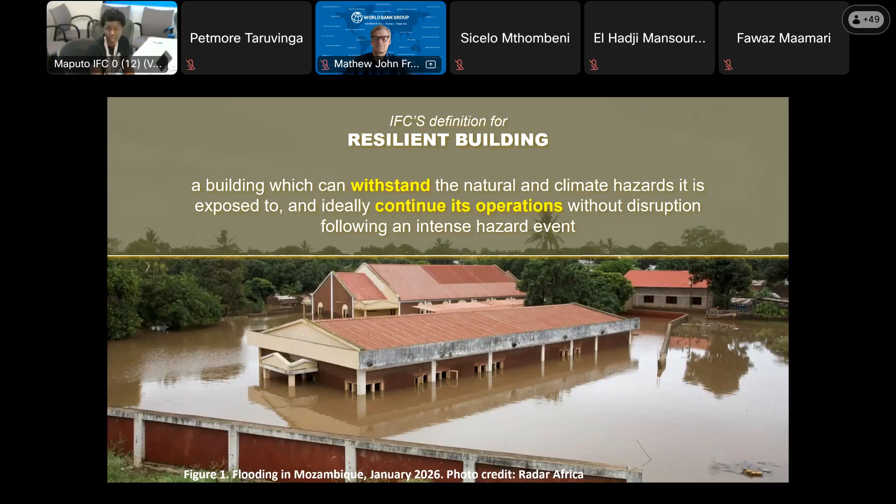So what makes a building resilient? First is the physical integrity. For a building to be considered resilient by the Building Resilience Index program, it must show that after a natural disaster, this building will be capable of maintaining at least 50% of its physical integrity. Hopefully the building will maintain more than that, but starting from 50%, it can already be considered resilient. But also, it is important for the building to continue its operations, so operational continuity is something that Building Resilience Index also adds on top of the physical integrity.

So the first step for a building to be considered resilient is to identify the site risks. By identifying the site risks, we can understand if we are choosing a location that is more prone to hazard risks. If we choose carefully, we can limit the amount of hazards that our building will be subject to. And then we can design the building to resist those hazards that cannot be eliminated, and construct based on this design that is already resilient.

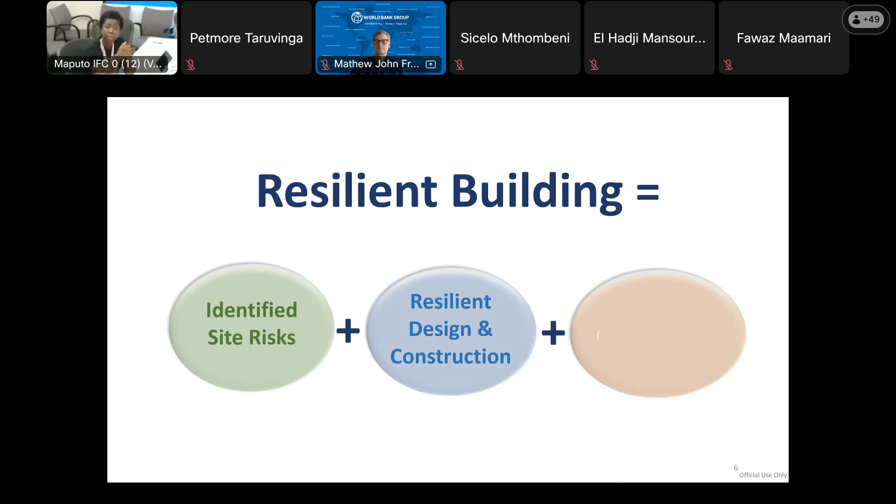By doing so, and including some maintenance actions, we can indeed have a resilient building. So diligent maintenance is also important, because without maintenance, even if we self-assess a building, after years this building can lose some of its integrity. So maintenance is also an important focus point for a resilient building.

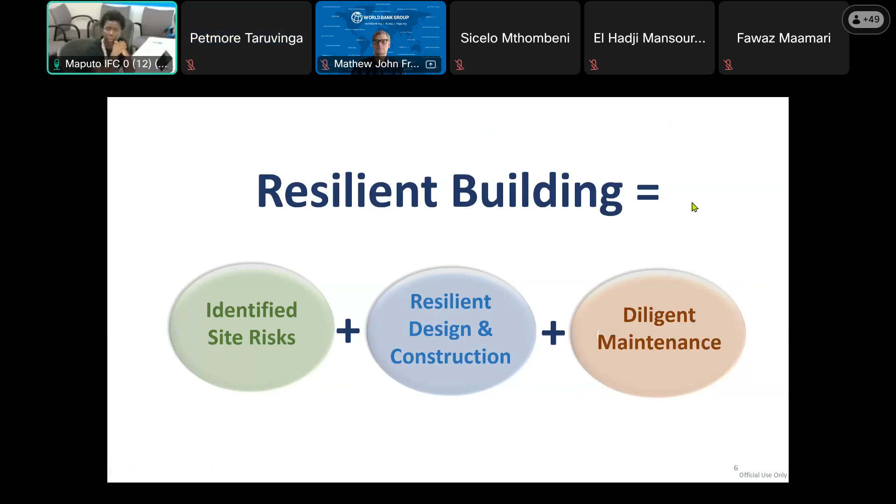What is the role that buildings play in climate change? Probably you have heard before about EDGE. EDGE is the Green Building Program of IFC. It is to tackle the climate change issue by mitigating the amount of greenhouse gases that we are issuing to the atmosphere. We know that buildings contribute at least 39% of the global greenhouse gas emissions from energy use. So this is relevant, and EDGE can allow us to minimize this percentage.

We can see that a green building may cost more, but this 3% of additional cost will be paid back in a period of 3 years. So from 3 years on, it will be only savings in terms of water consumption, energy consumption, and even in terms of embodied energy in the material.

But we also know that the issue of climate change is not only about greenhouse emissions, not only about sustainable construction, but it is also about climate adaptation. So we need to adapt to the climate transformation we are facing now. And this is where Building Resilience Index appears.

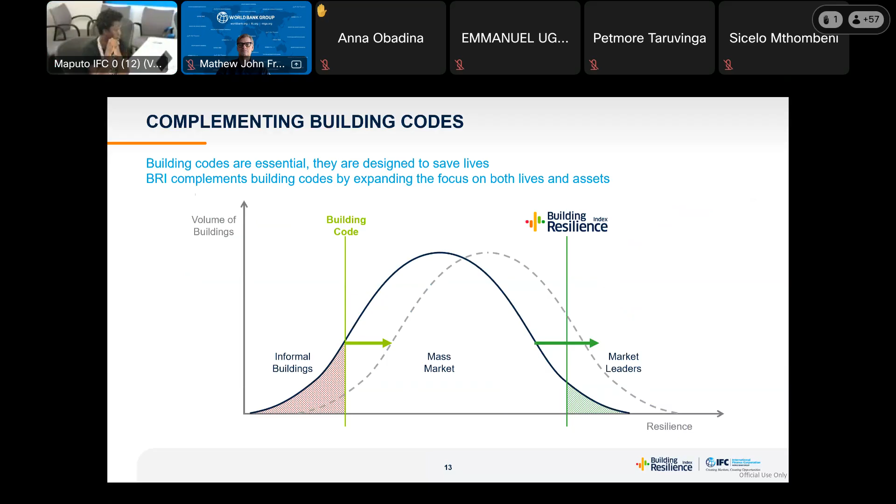I can see that Anna still has her hand up. Anna, would you like to comment or add something, or did you just forget your hand was up? Yeah, sorry, I forgot my hand up. I'll take it down now. Okay, thank you. Thank you.

So building codes usually focus not only on saving lives, but also on health and safety, and economy. For sustainability, we have EDGE, that is the Green Building program from IFC. And then for resilience, we have Building Resilience Index. So in terms of environment, we can use EDGE. I take the opportunity to tell you that we also have trainings through partners for EDGE, so you can search about it, and sometimes you will even receive some emails from us talking about EDGE and how EDGE is being implemented around the world. Going back to Building Resilience Index, we have several rating levels.

The more conservative one is the AA. This is the global best practice for buildings such as hospitals that can serve not only as a building, but also as a shelter, also as a place where people can go to have support when we have a natural disaster or a natural crisis. So a hospital could aim at being a double A.

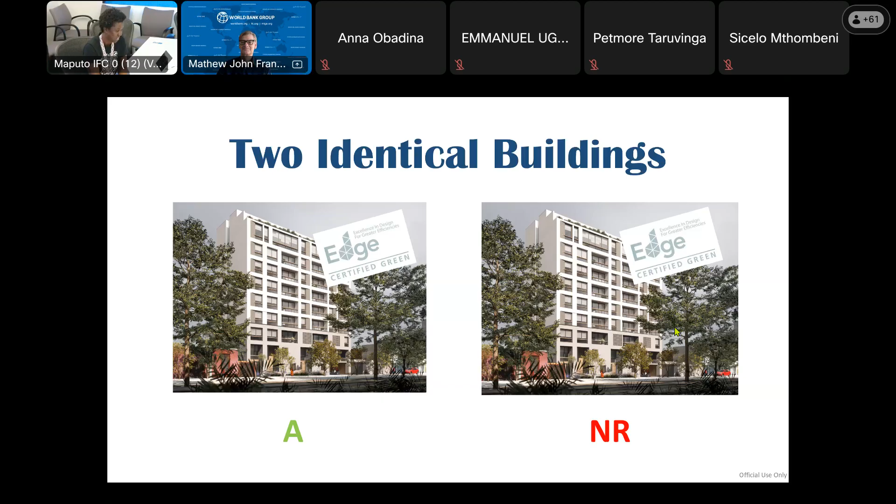If you want to intervene, just put your hands up, please. Anyone? I see Adoya, is it Adoya? Yes, your hand up? I don't think he wants to answer, but yes, please, maybe a comment, Adiole. Hi. Any other takers?

Okay, more, you have more seconds. Alexandra has commented: yes, it doesn't count because he's a verifier. But yes, it's a good answer.

If these buildings are in different locations, they are subject to different hazards. So of course it makes sense that one of them is rated A and the other one is rated non-resilient, because maybe the second one is in a location subject to more hazards than the first one, and should have more mitigation measures to respond to those hazards. This is the explanation why we can have two identical buildings with different ratings.

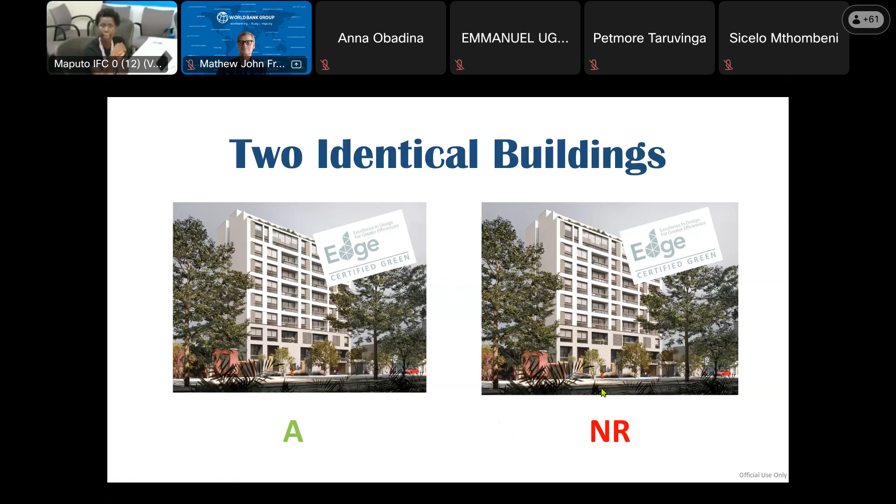So the answer was right, Alexandre, different location, and we can see that the hazards are different. The second building is subject to earthquakes, while the first one isn't. The second one is also subject to typhoons, while the first one isn't. So they have different hazards, and maybe the way the building was designed and built was in a way to respond correctly to downburst, subsidence, and urban flooding, but did not consider typhoons and earthquake.

And for Building Resilience Index purposes, you don't really need to mitigate a risk you don't have. So if you don't have typhoons in the location of the first building, you don't need those measures to respond to typhoons.

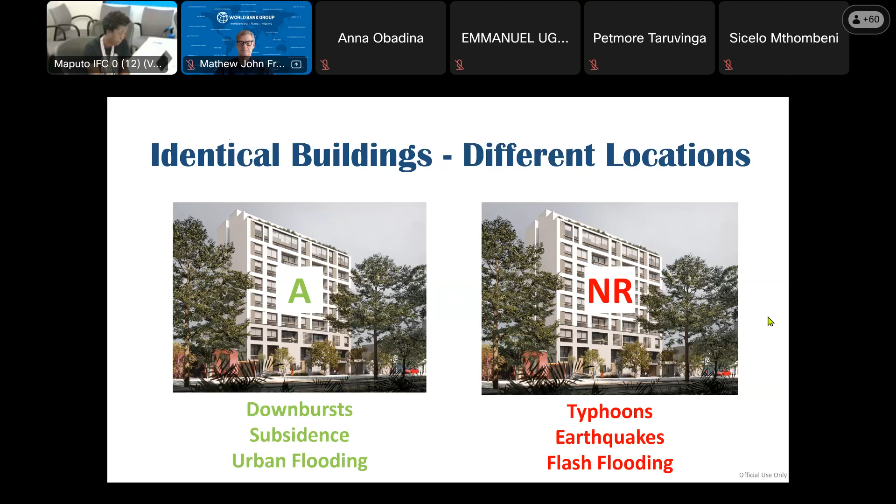So who do you think is the customer of a resilient building? Who is the customer? This is an open question from Matthew, so if you don't like the question, we have Matthew here, please. There's no wrong answers. Who do you work for as an assessor? Is another way to frame it. Who do you have to satisfy?

Edson has his hand raised, and George has made a comment. Yes, good afternoon. So I think the customer, the first one, it is the government and the community. I think I'm sure about this. Okay, that's a good one. If it's a government building, the government would be a client, and they also need to be satisfied from permitting. I see someone else had a hand up, was that Jose again? And then Edson?

I see several answers, right? Banks, developers, building owner. Some of the answers are in the chat. So all of you are right, okay? But we also have mother nature, right? If we serve the purpose of resilient buildings, we also serve mother nature. You agree?

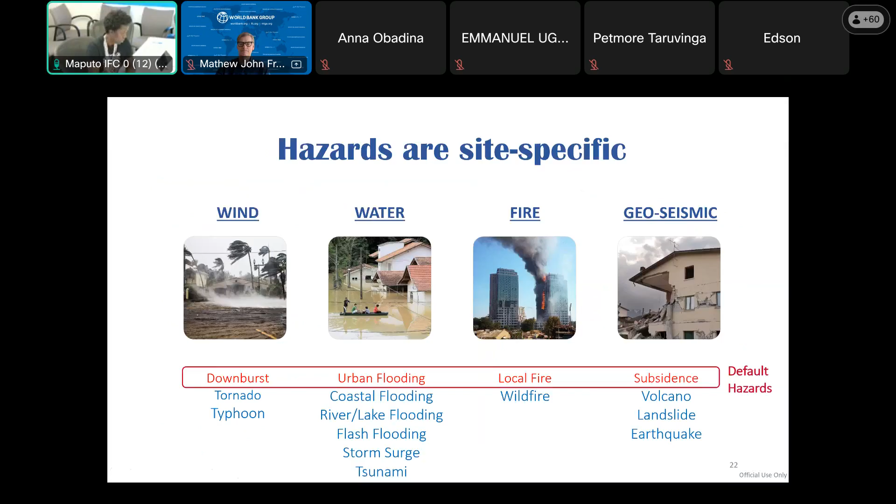Any type of building can be self-assessed with the Building Resilience Index. The building can be new, existing, or retrofitted. BRI can be used for residential, office, retail, even mixed use, airport or port. As long as we have buildings there, Building Resilience Index can be used to self-assess and verify the level of resilience of the building.

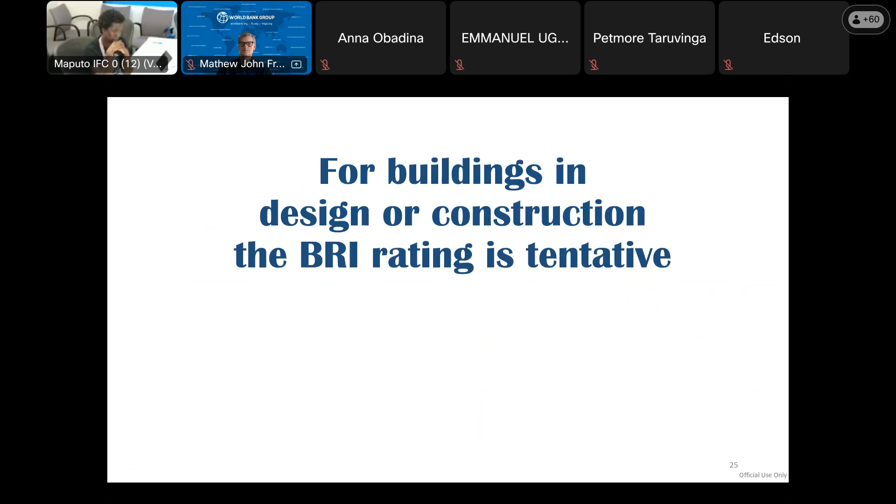For buildings in design or construction phase, the BRI rating is tentative. That means we cannot say for sure that the building meets a given rating if it is not yet built. We can only verify a building that has already completed construction. It's recommended that you self-assess during design or construction though, because by doing so you can adjust measures to improve the level of rating of your future building. The final rating is only given after final verification.

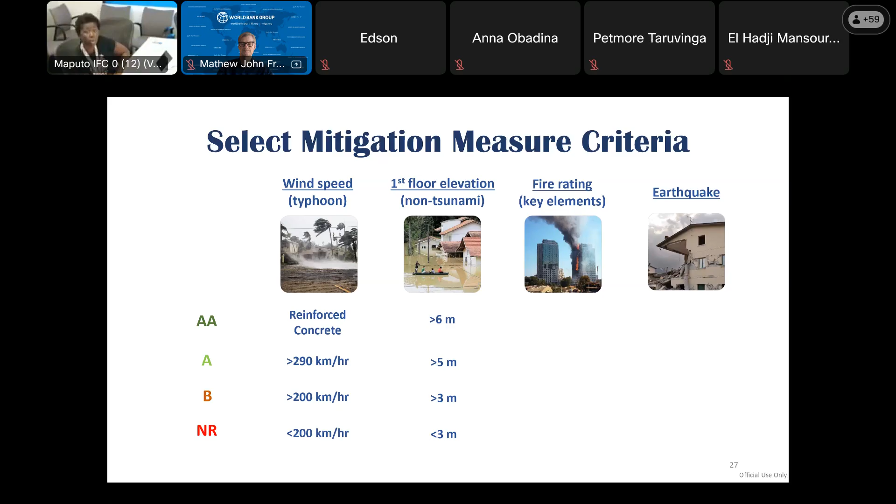There's a difference in terms of the platform. For floods, not tsunami, the Building Resilience Index analyzes the first floor elevation. To be rated AA, your first floor should be elevated more than 6 meters. But if it's located less than 3 meters above the water level, the building will be non-resilient, because in a scenario of flooding, the building will not be resilient.

We have one comment, I'll just read it: Given BRI focuses on buildings only, are there plans to align it with complementary tools for transport and utility infrastructure? I'll leave this question to Matthew, our technical lead, who can answer this one. Thank you, sure, I'm happy to address that.

And the answer is yes, we have formed a partnership with the Coalition for Disaster Resilient Infrastructure, part of the UNDRR affiliate, and we'll be working with them on their tools, as well as the Global Facility for Disaster Reduction and Recovery, which is within the World Bank. We are collaborating with them through some partnerships which have formed internally, so that is the intent.

Buildings, of course, are in all sectors, including infrastructure, to control them. So there's a need to look at both from a whole community perspective. IFC focused on buildings, since that's the largest single sector in the built environment, and one which IFC does a lot of investment in. But we also do work with other entities.

It also raised the question someone asked, I think it was Jose, about subterranean and maritime buildings and structures. There is a trend, there is a relationship. So when we say ports, it could be warehouses, but also anything that is a wall, you could use BRI design. If it is a retaining wall or a port quay wall, we can analyze it as a structure, and the structural engineer will design those. So that's one area you could be doing some work within, part of a bridge, or if it's a retaining wall or a port structure, those could be assessed with BRI. But anything that is not a structure analyzed like a building...

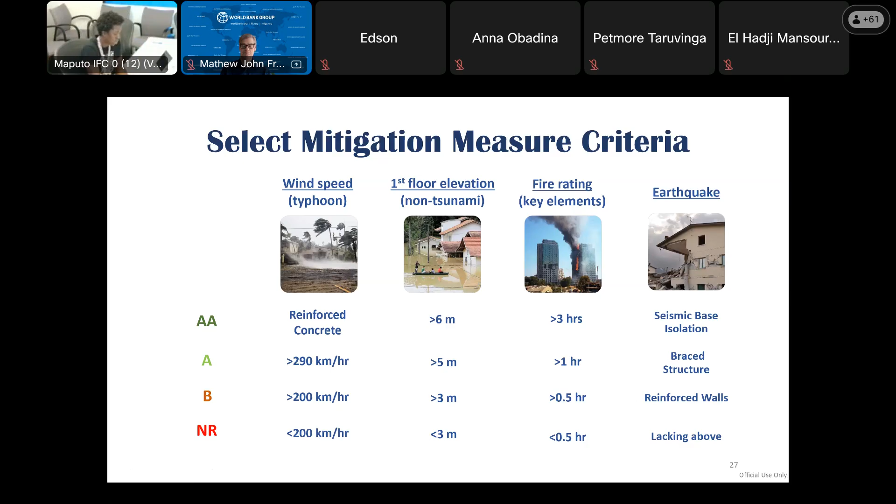Just to complete, in terms of earthquake, we have seismic base isolation for AA rating, a braced structure for A rating, reinforced walls for B, and lacking all of the above, your building cannot be rated as resilient. It should have at least one of those measures to resist an earthquake.

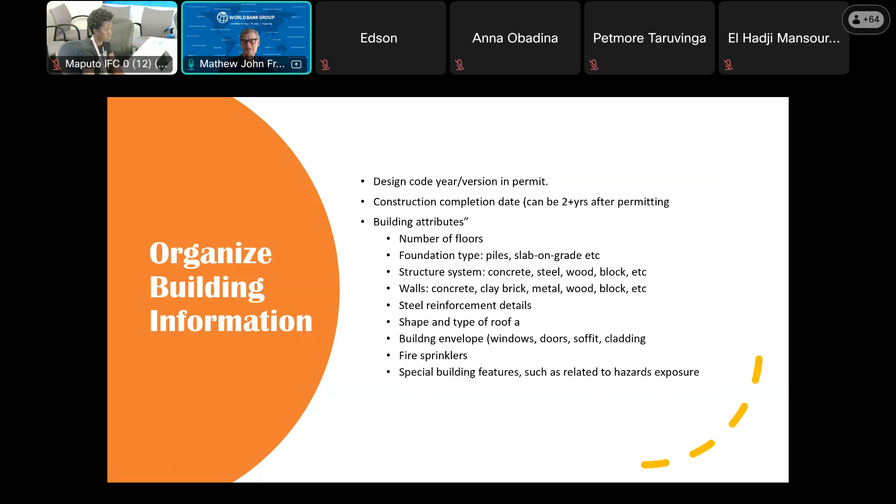For the hazard applicability, BRI will do that for you. You need to review what it tells you, if it makes sense. We've been doing some adjustments. Some places of the world are remote. The maps cover the whole world, but there are always bugs in large software systems, so they can come up. We're working to address them as they come up. But if you see a discrepancy in the app, explain what you see and bring it to us, and we'll go in and investigate and debug as needed.

The hazards given to you should make sense from a local standpoint, and ask questions if they don't. If you have better data to determine that a hazard is not applicable, maybe a local flood study or a wind study, we need to review that. We can remove applicability if we have data showing it is not applicable, that supersedes the default data in BRI.

You also have to affirm, besides checking the hazards, the resilience measures. You're going to reply yes or no, but we also need to explain how they're applied, or will be if it's a new building, or how they are applied if it's existing. And then after design, provide the evidence of the drawings and calcs related to those measures.

Again, if it's not applicable, we need to document that. One of the things is there's a maybe option, that's a placeholder. It won't count towards the rating until you make it a yes, but it does serve as a reminder to go back and check it during design or during construction. So you can use this as a tool that way, but until it's confirmed a yes, everything marked maybe is turned into a no in the ratings.

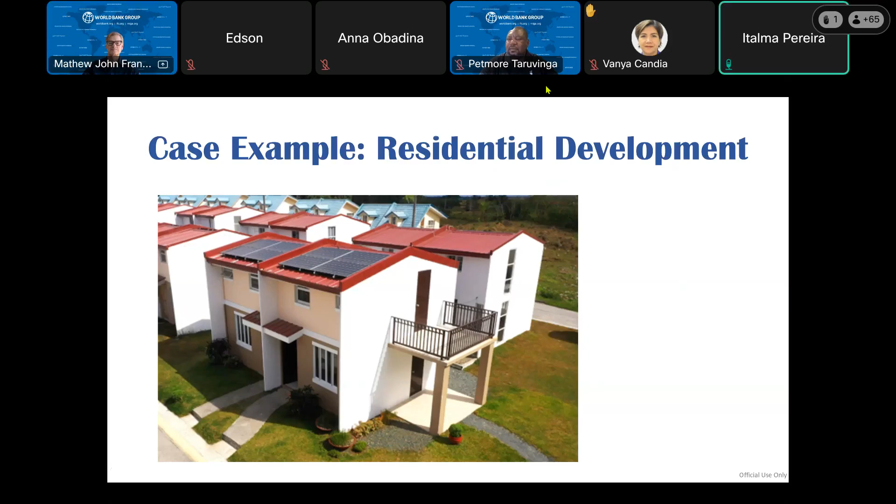But if you are looking for specific options, you have a lot of them in the operational continuity measures. If your building is a sustainable building, you might have a certificate for that, and this will count as good operational continuity measures. You might have solar panels — this can also count as good operational measures. You could have a water storage tank, and this can also be counted as a sustainable measure if you are collecting rainwater, for example, and also for BRI as a secondary means of accessing water. These are a few examples.

Thank you. There is a synergy — that's why we give points for green certification, and for the reasons you just said.

I saw another comment — one question about Uganda. Yeah, there we go. Thanks, Vanya. Any other technical questions?

I know we're at the bottom of the hour here, and we have an example to go through, but I think we're out of time. What we can do is send the slide deck and have you work through those and report back to us what you found. We could do another session as a follow-on, but I'm just mindful of the time.

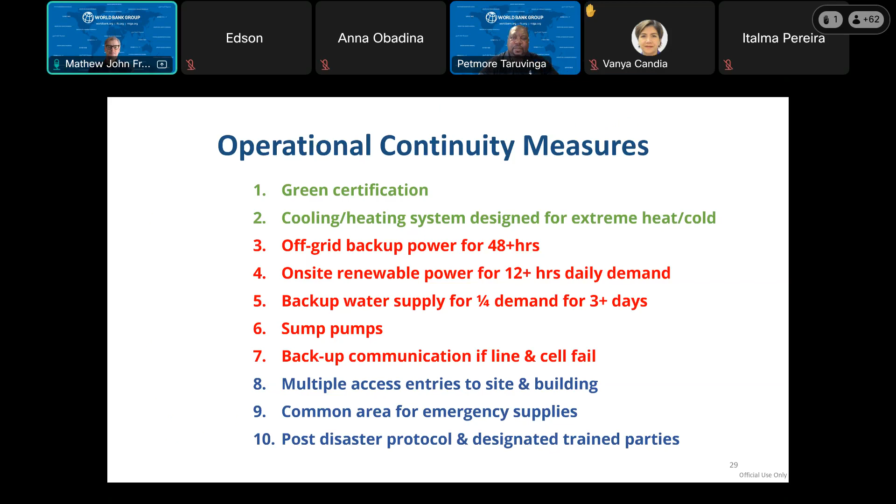So with that as a wrap up, what we'll do, I was just going to show you here. We went through the verification list, and that's really the heart of what the examples were, to walk you through that list of verifications. The user guide is on the BRI website.

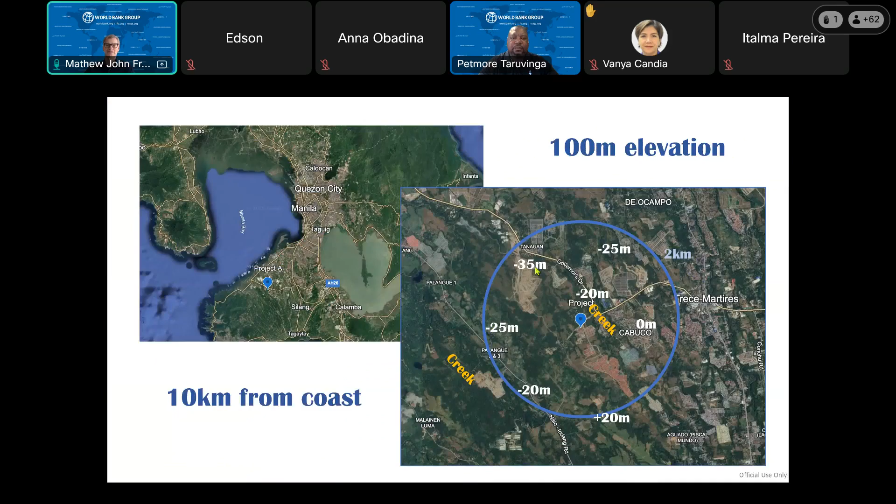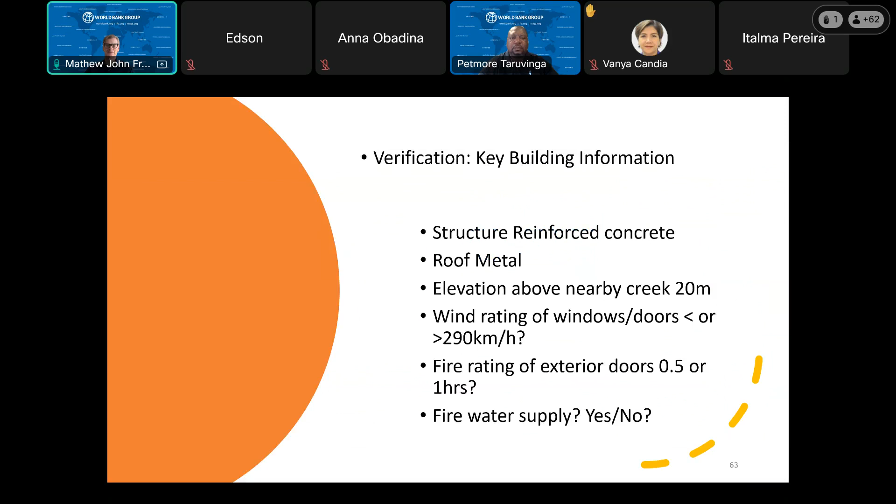So if you go to the website, this is an example of the site evaluations we talked about developing. If you go to the website itself, you'll see, where is that slide? There. openresilienceindex.org, and you can create an account. You can go to this learning tab, and it has the user guide in it.

And it can go to the Explorer tab, and you'll see the different hazard layers so you can see which hazards apply to your area, put in your address, create a project, and then it will tell you the applicability and the intensity of the hazard. So that's part of the exercise.

We'll send you some information so you can complete that on your own. And then, like I said, we're introducing a practicum so we can meet with you individually and go through the measures as you perform your first 2 assessments. Anyways, good luck on that. We appreciate your interest. Hope all of you that have your 5 years of professional experience will take the test to become an assessor, and also encourage the younger ones to team up with people with 5 years so you can help work towards that as you advance your career.

Vanya, you have your hand up? Maybe it's from the last time. I shared also a direct link to the user guide. Okay, great. Oh, yeah, so you've got the link there. We'll get the slide deck out.

Any other final questions before we send you on your way? Petmore, Italma? I'll just do some closing remarks from you, Petmore? I'll just do the closing remarks once you guys are done. I'm sure we don't have any other questions.